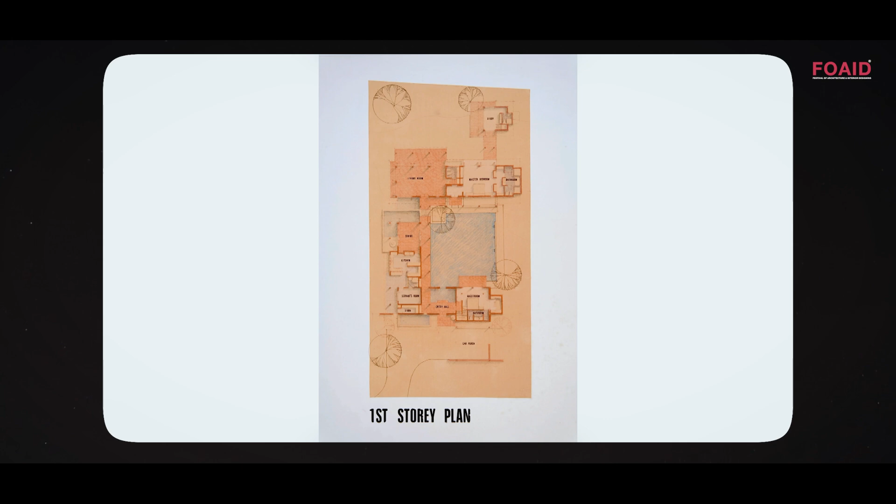The first one was actually my first home that I designed in Singapore as an architect. We're talking about probably 30 years ago, in which this was a very small plot of land, so to speak, in which the main aim was actually to create a circulation from the beginning to the end of the project, which was able to generate a circuit in which people would be able to see every aspect of the property.

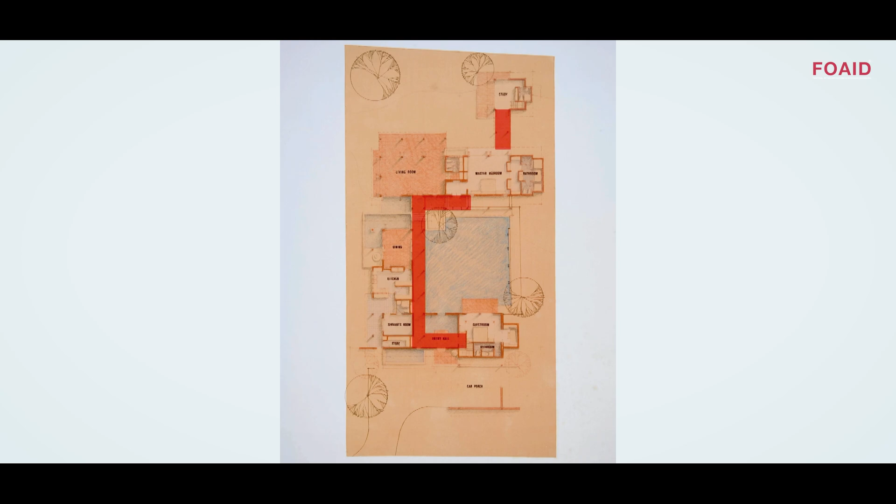Not necessarily to see it all at once, but basically discovering little by little, going through this particular circulation. The circulation is completely open to the environment, which was purposely done in that way, I think, so that the level of rain and the sun, etc., is quite attractive. And I wanted to celebrate that as much as possible.

The entrance of the house - again, in that particular time when I was beginning to work as an architect in Singapore, I was really fascinated by the work of Geoffrey Bawa, a Sri Lankan architect, and somehow I was trying to emulate, so to speak, his type of architecture - using old elements, columns, and doors to represent into my homes.

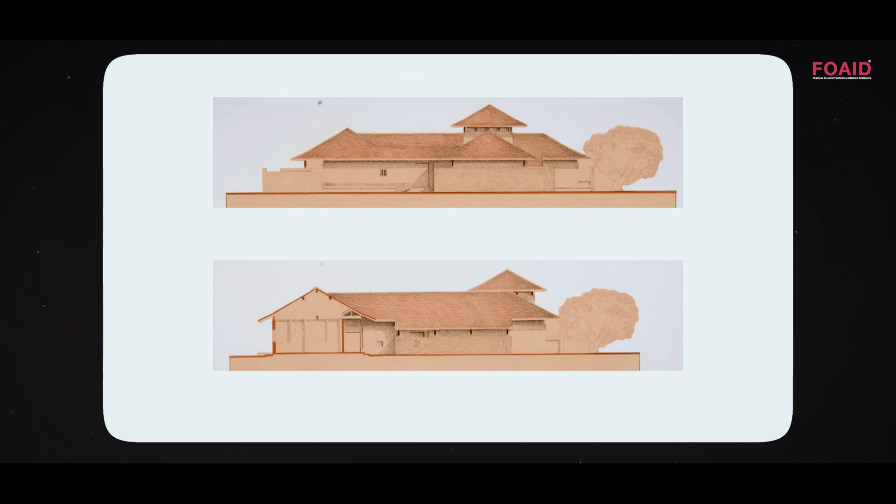From this circulation, this entrance that we have, we needed to create this very large roof, which was actually going to be the creator of my circulation in a very natural manner. So from there on, when we enter this property, we just discover basically the main space of the house, which was the courtyard.

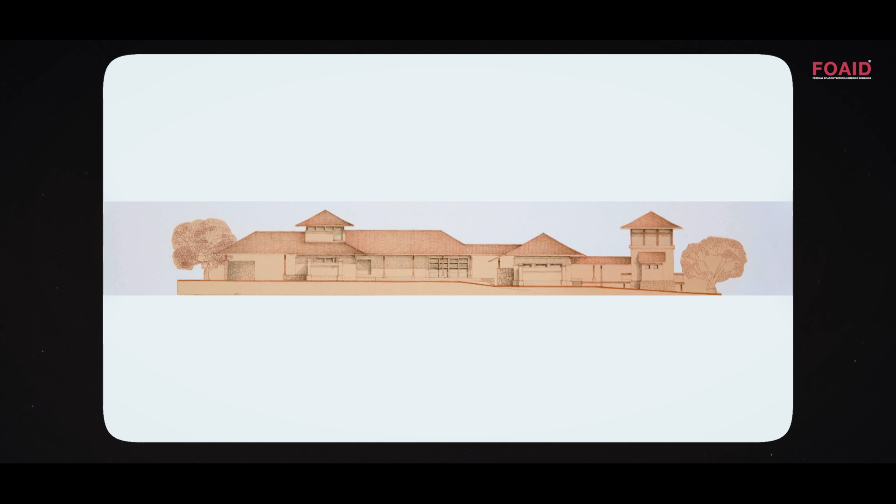In this case, we selected a garden to be a water garden. So the entire center space of this house was this water body, which was as well the swimming pool of the house. As we can see here, the roof has a very traditional aspect, very large eaves, and these eaves are the ones which actually create the proper circulation of the house.

This is actually the middle, the center space, and as we can see, all the different elements of the house are facing this courtyard. And of course, we have greenery space in different directions of the house, but the center, the heart of this house, was this water body.

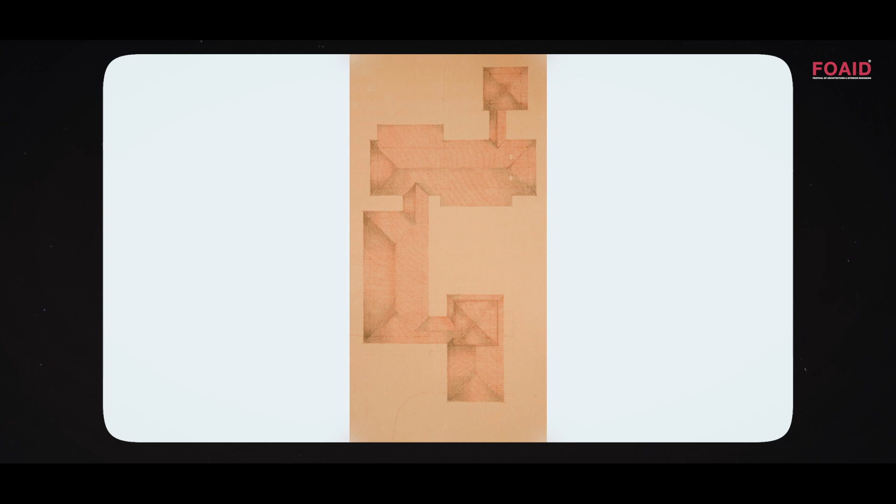Again, a different part of the views. The roof structure creates these four pavilions, so to speak, and shows how you move through the side to the very last pavilion in the end.

The circulation, as I mentioned, is actually the creator of the spaces, expressing in a very natural way all the structures, and the connection between different spaces.

Again, this center space, which I think is the most relevant space in this particular house, and which generated many other different typologies that I have been using throughout my profession.

Different spaces, all of these areas are completely naturally ventilated, but at the same time there is a need for air conditioning, as sometimes of the year the heat is unbearable.

From there on, we just pass through to a much more recent project. This project was done only a few years back, but interestingly, it uses the same philosophy that I used about 30 years ago.

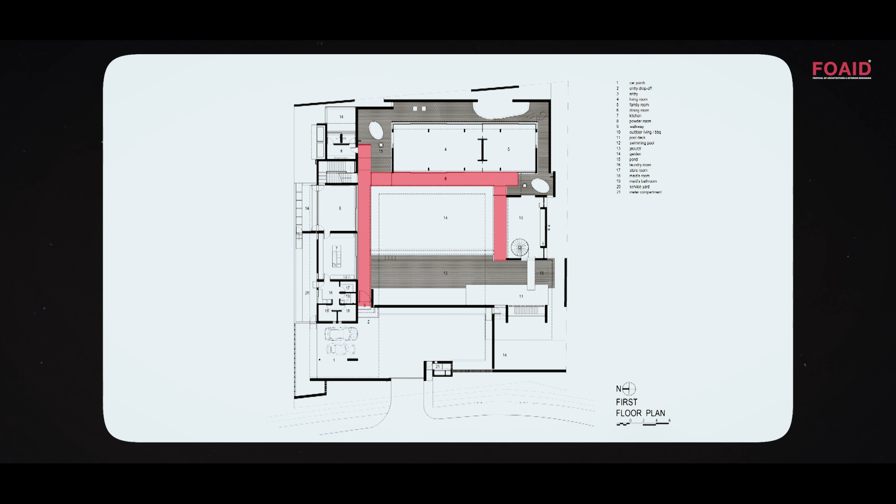From the outside, we normally tend to keep our projects very quiet. That means it's very difficult to see the projects from the street side. We believe in privacy, that the people in the house should enjoy it without the disturbance of any public eyes.

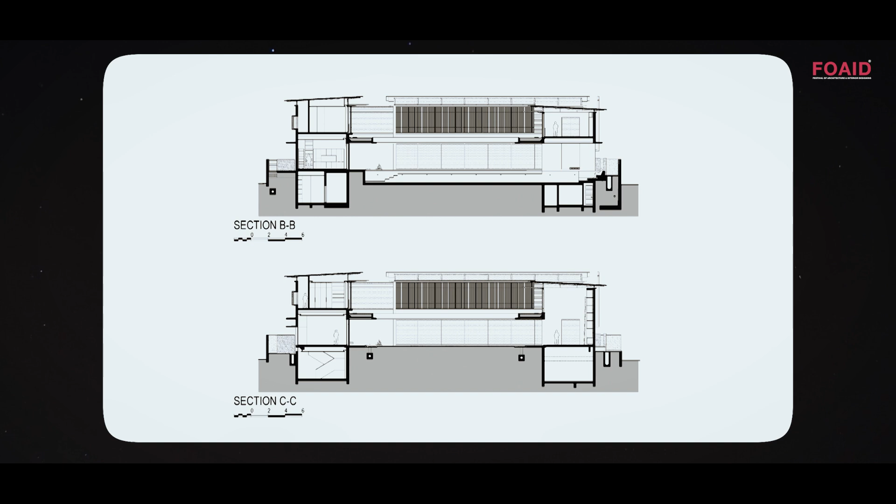Here is a section showing the use of a very important, very simple roof structure, and again a sort of cantilever of 4 meters, which creates the circulation and a garden area. We will see this later in the photographs.

Just a general view. This is actually the access to the house through this particular space, which is the circulation proper of the house, completely open to the elements. That means to reach from one end to the other, we have to really appreciate the environment.

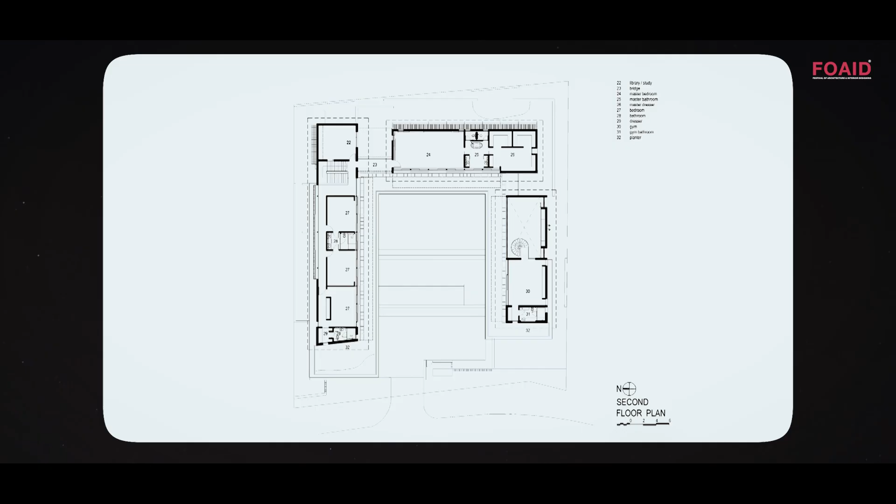Again, we can appreciate in these floor plans how the simplicity of the design is created by three elements once again. And this is actually showing the upper portion of our property.

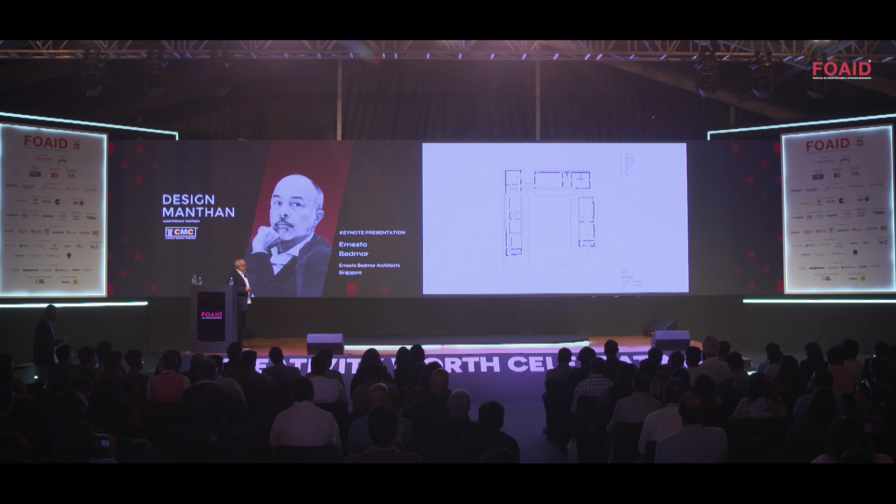We can see all the garden that has been created, which is actually the circulation below. This is what happened in the upper portion, and to a certain extent, the use of timber, which is very large.

And this is what happened in the upper portion of our homes, actually creating this garden, which gives us the feeling of being completely like it was a natural ground, no difference. And this is actually all the bathrooms of the house.

Again, the landscape is growing by the day and making a tremendous impact on the house. And once again, the transparency and the use of water, as we can see, all the pavilions have not only the swimming pool, but as well the use of water, which creates a very refreshing kind of atmosphere in the tropicality of the city of Singapore.

Again, the greenery in the evening and actually the transparency of all these spaces.

From here on, I'm just showing another project, which is actually in Indonesia. This is another villa, which has a very complicated site situation, in which the circulation for this project was actually a very intricate situation, but because the site was so difficult...

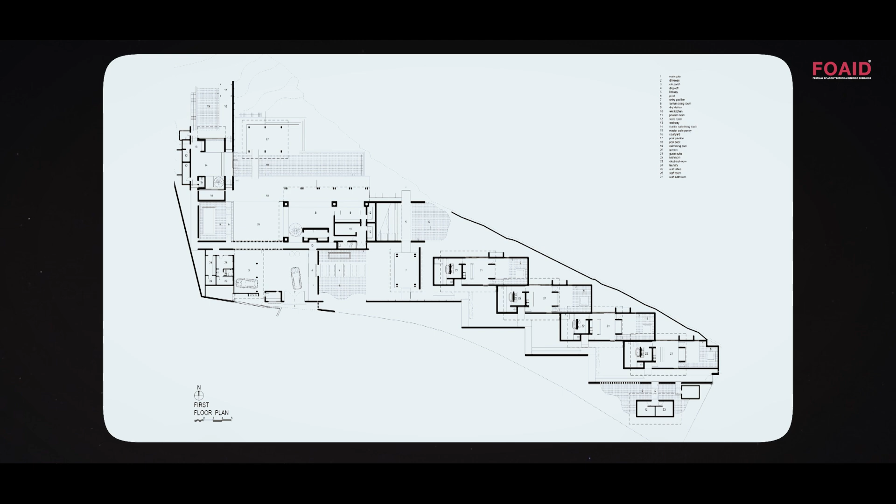We only have the center portion of the house which enjoys a sort of a garden. The rest of the units, the bedrooms so to speak, they didn't have a general view, so we decided to create a very much internal view and the privacy that was required for the bedrooms. So we decided to allocate the four of them in a situation where they enjoy the internal spaces.

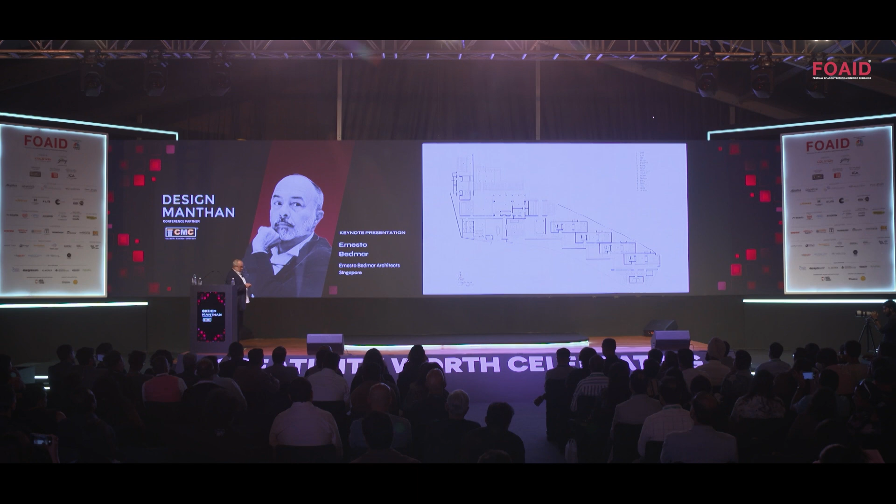And the main unit of the house, meant for the owner of the house, which is here in the upper portion of the plan, that one does have an attractive view as well.

So this is what happened when we arrived at this project. We have a very elongated circulation. In this case, because it's actually in Bali, and the weather conditions are quite positive, very seldom do we have rains in this part of the world. And therefore, we decided that all the circulations will be completely open to the space.

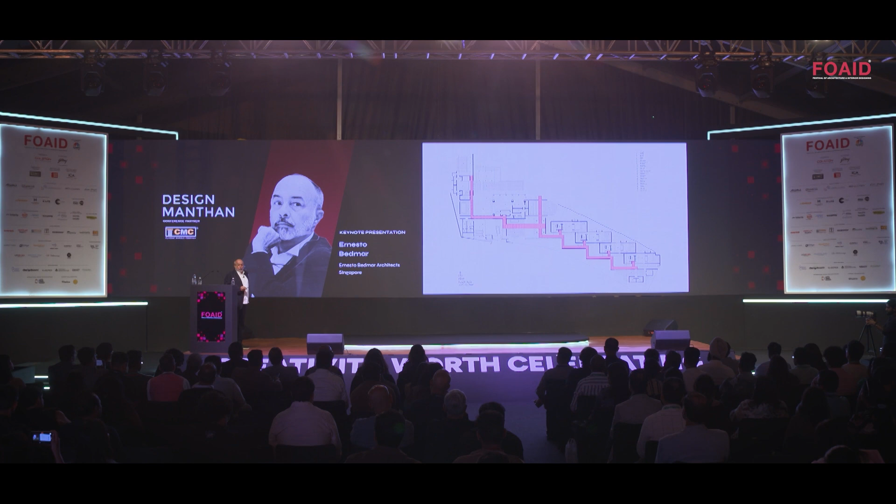From there on, we have the main access into this property, in which basically there's a sort of sense of perspective, showing different pavilions and different elements, which is guiding the person coming into this property to be able to move through it.

So from the main entrance, we see the main sort of arrival point, from which we have a choice to go into the private parts of the project or to the more public spaces.

Once we arrive at this pavilion, once again, we have created a very strong sense of perspective. Interesting enough, this perspective is created in the direction of a volcano, which is a very important element for the Balinese people. Unfortunately, because of the mist and so on, the volcano cannot be seen very clearly from this level.

So we have created these particular staircases, which lead us into the main living room of this property, from which particular point we are able to see this volcano and this view, which is actually very important for the Balinese people.

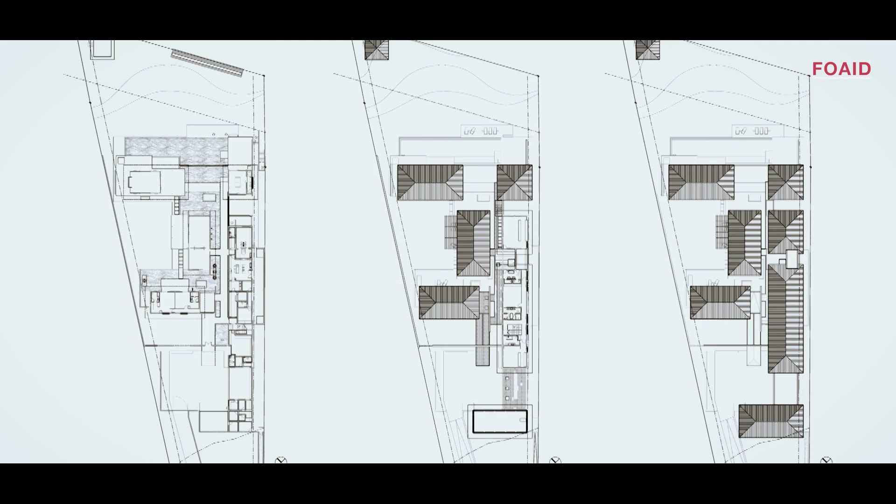From here on, going to another project in Jakarta, which was quite difficult to achieve. There was a very narrow entrance to the site and a very elongated site, with a golf course at the very end. So something which looked difficult to approach at the beginning was actually a beautiful opportunity to create a series of courtyards and gardens to make people able to penetrate throughout the project to arrive at the end of the property, where the main areas like living and dining rooms are located.

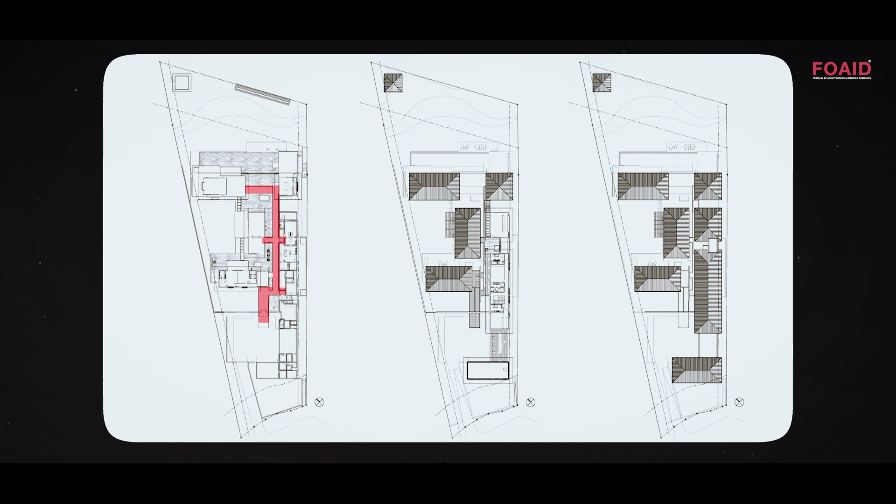Again, the architecture is a very simple approach, a pitched roof, very traditional from Indonesia. This is what happened with the circulation from the entrance, from the drop-off point of the car, leading all the way through to the end of the project, where the living and dining rooms are located, taking the most exciting views of the golf course behind.

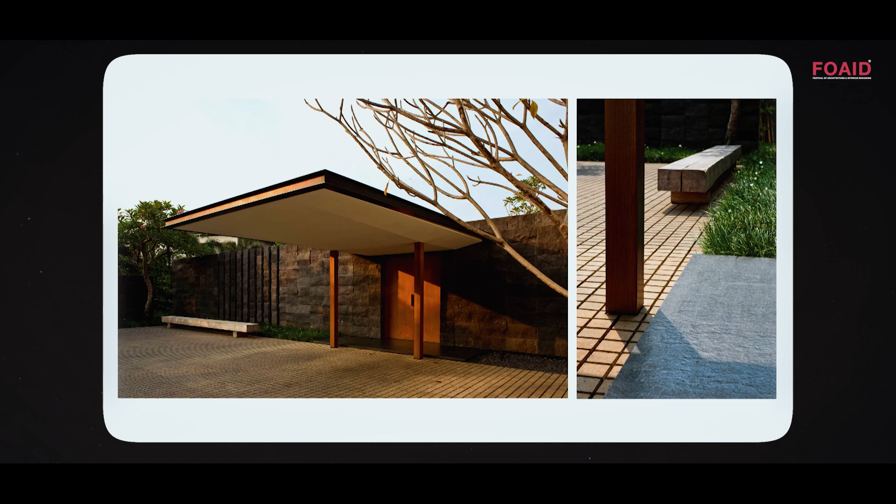This is actually the entrance, once again very discreet, very simple, which allows us to come into this drop-off point.

Important enough, for the materiality of this house we decided to use volcanic stone from Indonesia, which is a little bit like a potato to describe - the skin is actually very rough. We used that scheme of the potato, so to speak, for all the walls, and the inner part of the potato we sliced and used as the floors. So actually all the materials used in this house are local material - the timber is all from Indonesia. Here we can see the contrast between the floors and the walls.

Once again, this circulation takes us from the beginning of the project through a series of water bodies. Some of these water bodies are used for fish, as we can see there, other ones are used for greenery and plantings. This circulation is covered because Indonesia has a very heavy rainy season, so it would be impossible to be completely open.

Again, different bodies of water have different approaches, all leading us to the very end of the property, which is where we begin to find, in this case, the dining room, and across the body of water we have the living room for this house.

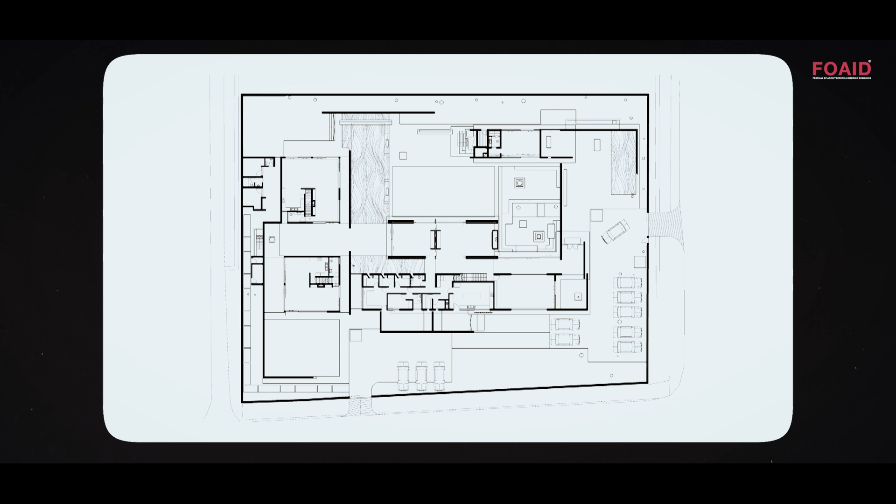Again, this was the first time that I designed a house outside the tropics - we are in a sort of desertic situation. So the idea of using a flat roof was a completely new language for me. The usage of the terrace as entertainment spaces was again something difficult, but we managed to put it together, I think so. Even though it's different from the tropical houses that we designed, the circulation was a very important element to link the different spaces and to be able to appreciate as much as possible the gardens that we were creating.

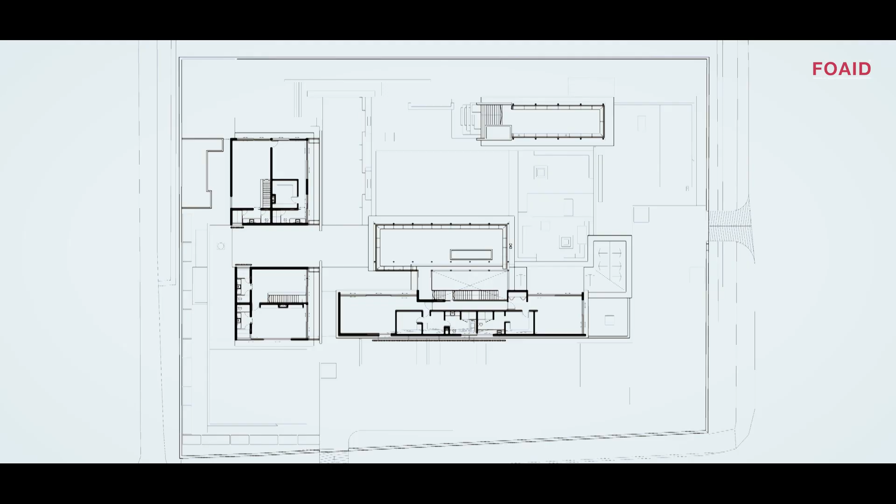In this case, the vastu requested the entrance door to be facing north, and the puja room, which is in the upper portion of the house, facing east, and so on. But somehow all these difficulties gave us the opportunity to create this kind of circulation which benefited the house greatly. This is the upper portion.

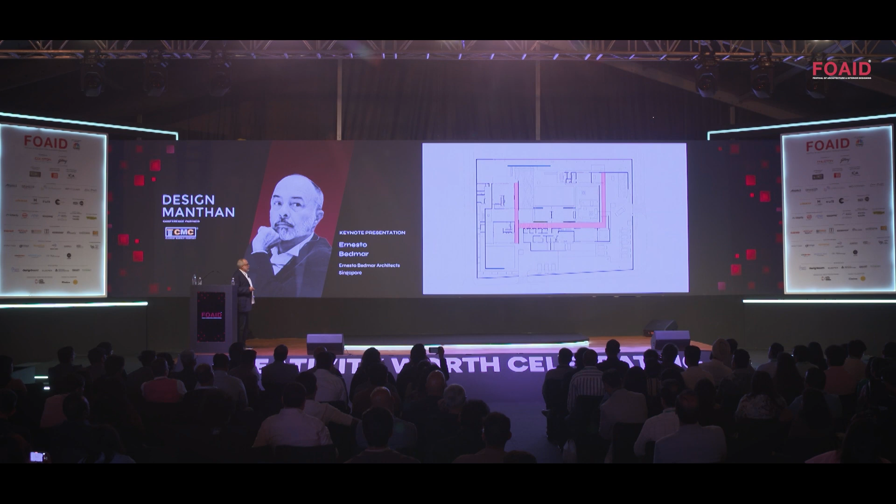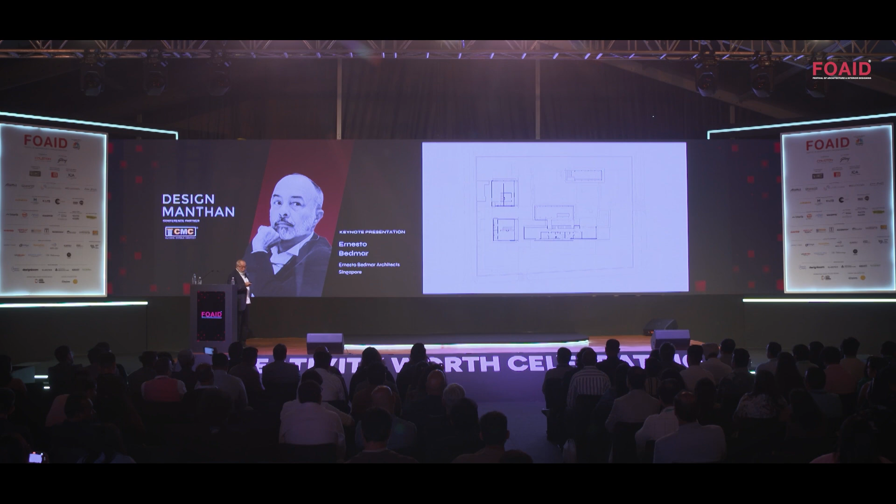Once again, from the outside it was a very discreet approach. People really are not able to see or understand what is happening inside the house.

The materiality in this case was to use travertine in a very solid manner, as solid as possible. Again, we used some Indian kind of element created in this timber partition, which is enclosing, in this particular case, the puja room of the house.

Again, the simplicity of the architecture was in many ways due to the lack of understanding of Indian architecture. I did allow the art pieces and the art collection that this client has to probably show the Indian aspects of the family.

As again, very small sort of objects in these plinths that we have created, indicating the family background. The entrance to this space.